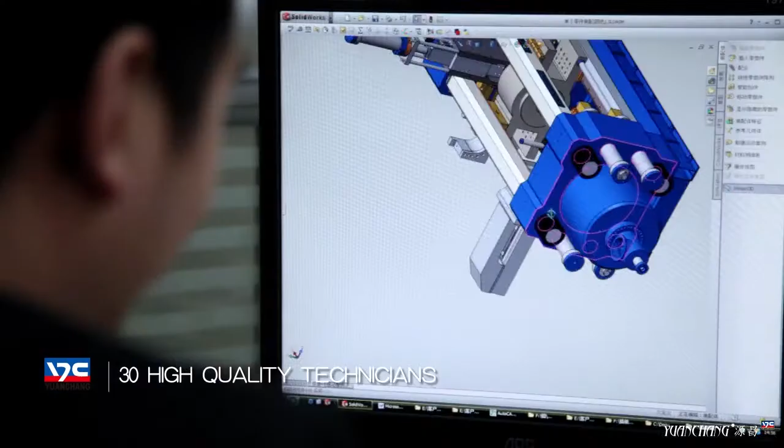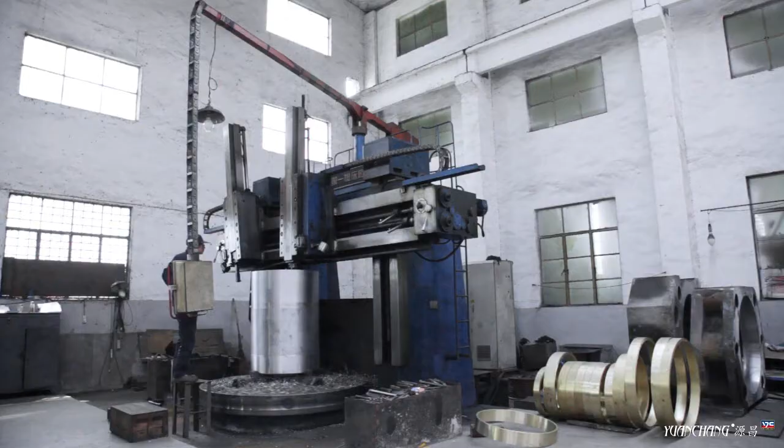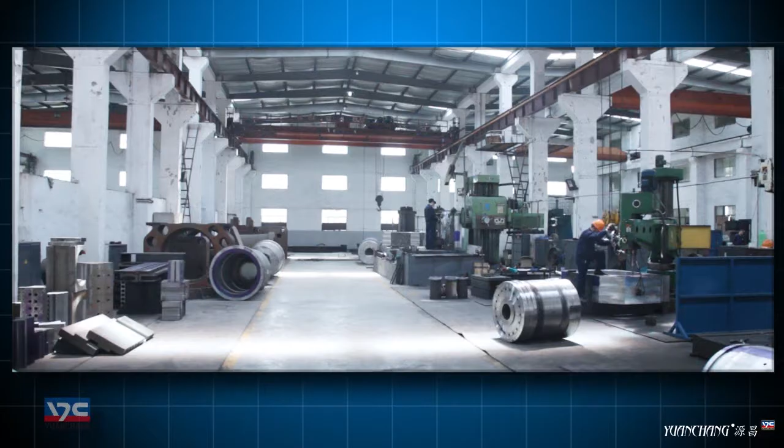Now the company has an area of over 30,000 square meters. The fixed assets reach over RMB 21 million, with high technology support from over 30 high-quality technicians and strong machinery capability, including more than 80 sites of machining equipment, such as heavy vertical lathe, large horizontal lathe, machinery center, NC numerical control lathe, boring lathe, milling lathe, drilling lathe, planing lathe, grinding lathe, etc.

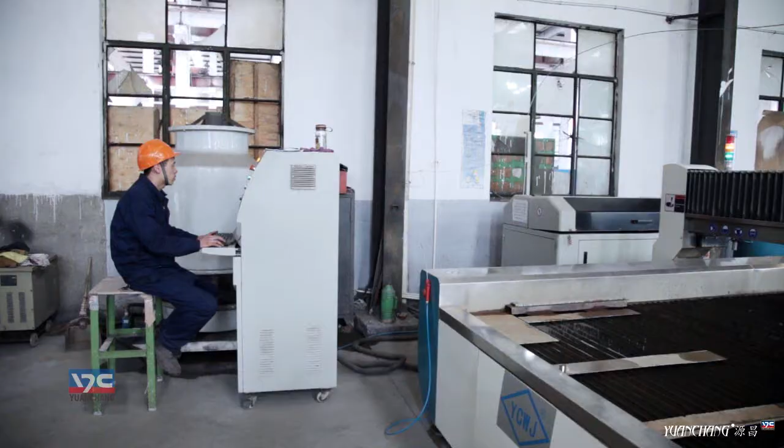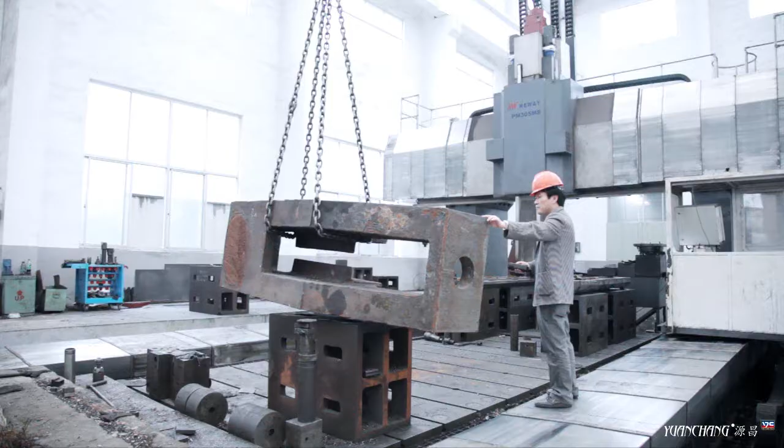The capability of the crane in the workshop reaches 100 tons. Meanwhile, the company invested in automatic water jet cutting machines, automatic cutting machines, etc. By yearly increasing the capability of technology and machining, Yuanchang Company persists in improving the quality of extrusion presses.

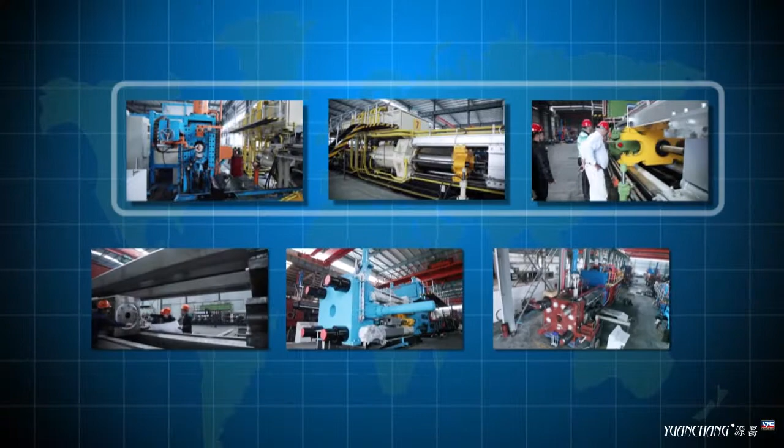Yuanchang Company has laid a strong foundation in the non-ferrous extrusion field. Recently, Yuanchang Company achieved the EU CE certificate, ISO 9001-2008 Quality Management System certificate, ISO 14001-2004 Environment Management System certificate, Measurement Guarantee Confirmation certificate, and several technical monopolies. The company is one of the most famous private technology enterprises in Jiangsu Province and a member of the Shanghai Non-Ferrous Metals Industry Association.

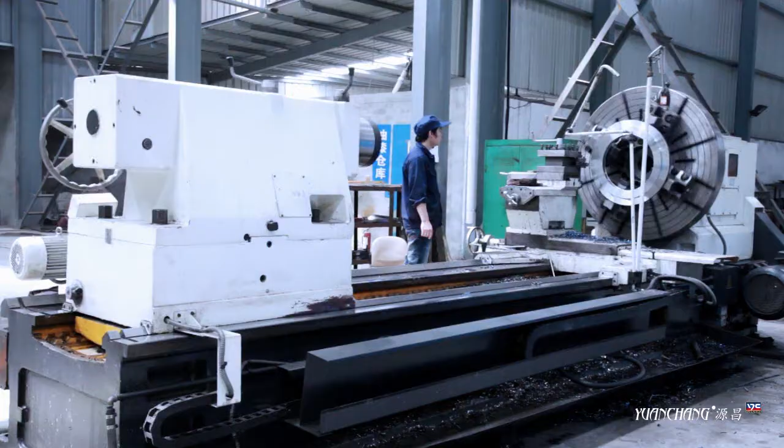On April 16, 2013, the subordinate enterprise of Yuanchang Company, Wuxi Yuanchang Machinery Tech Company Limited, started cooperation with Suzhou University and established a graduate student workstation. With the support of scientific research resources from Suzhou University, Yuanchang Company will achieve improvement in research and development strength. The product innovation will realize a qualitative change.

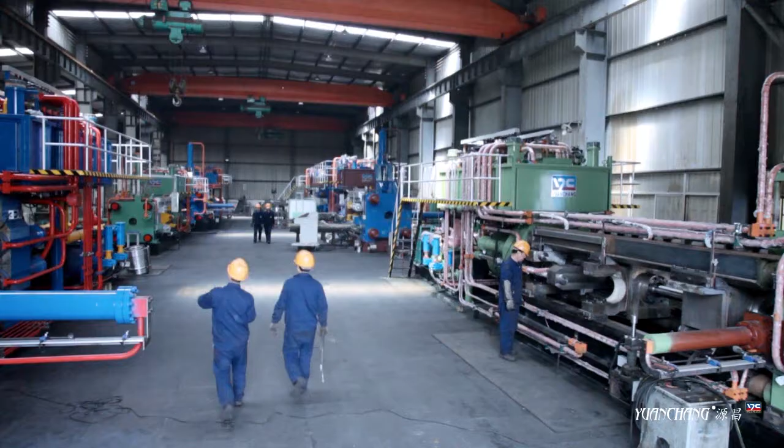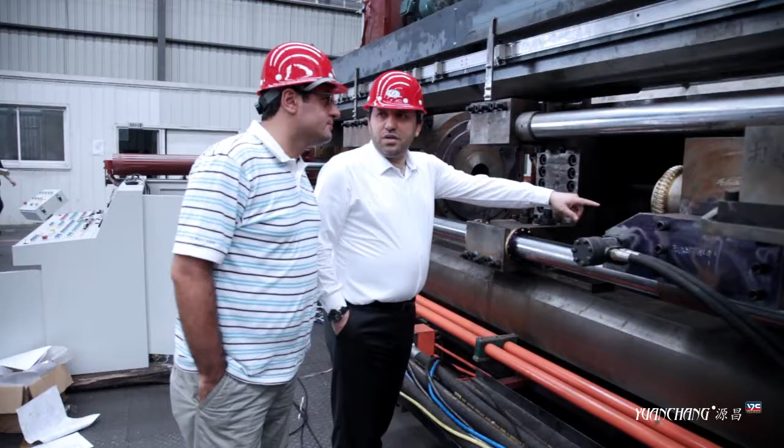Prosperity from improvement. Yuanchang people always keep a sense of tribulation and devote diligent, steadfast work to pursue the sustainable development of the enterprise. Achievement from innovation. Yuanchang Company always follows up on customers' requirements and improves product quality. The purpose of the company is to supply customers with the latest non-ferrous metals extrusion projects.

With great concentration management for several years, Yuanchang Company always achieves various work experiences. The company uses these experiences to realize customers' requirements. The experienced and professional image helps Yuanchang achieve acceptance by customers.

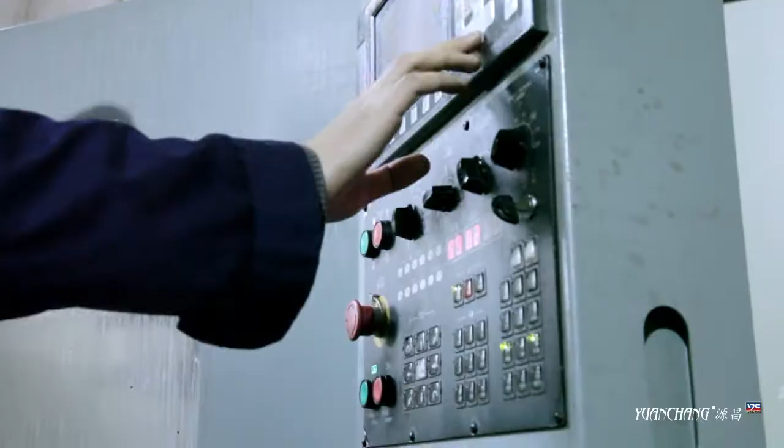The annual sales of Yuanchang are always number one in the Chinese industry. The stable increase of market share brings Yuanchang sustainable development. Meanwhile, it is also the endless power for technology improvement. Now Yuanchang extrusion presses are exported to many foreign countries, such as Russia, USA, Australia, Japan, Korea, Turkey, Syria, India, Uzbekistan, Argentina, Brazil, etc. Quality wins future.

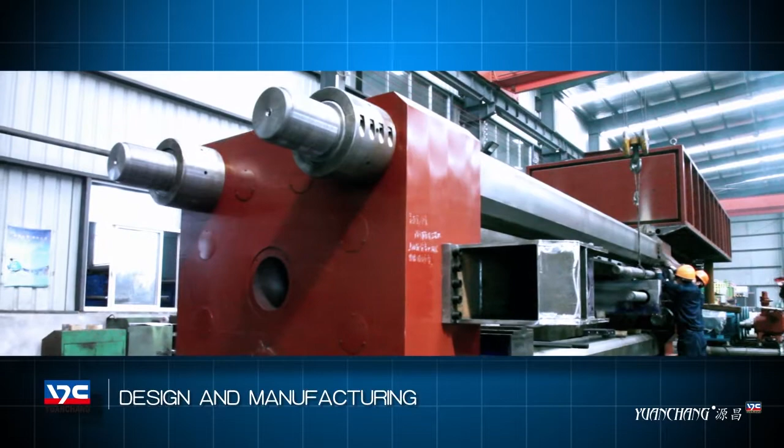Good quality is determined by carrying out each step during design and manufacturing, by the inspection of raw material, components, installation, and working pressure. Yuanchang Company follows up each step carefully for providing good quality.

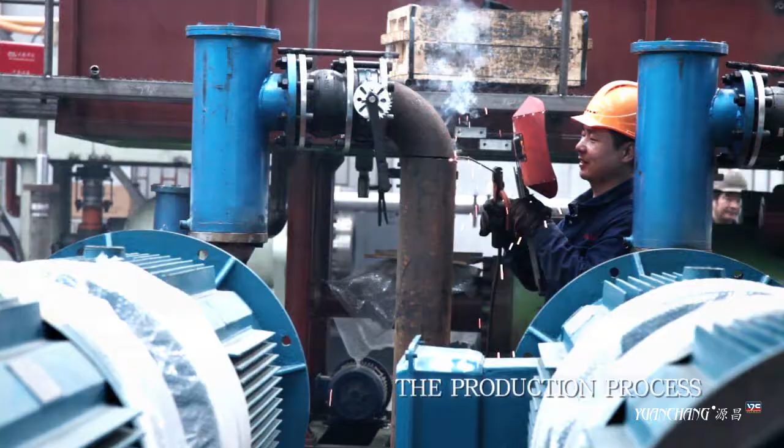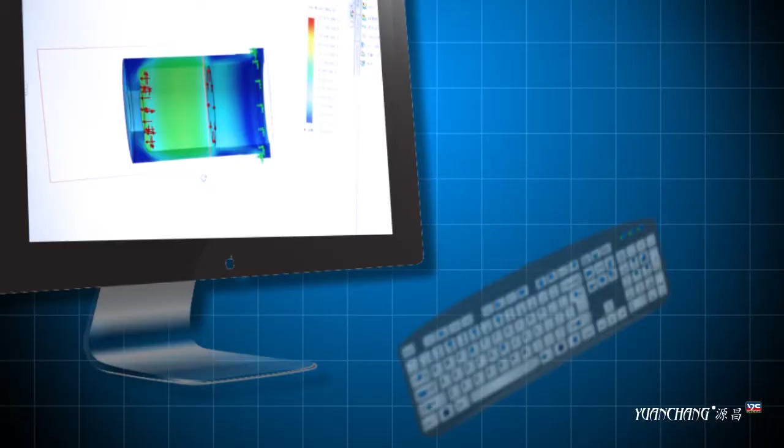Main mechanical parts are made of forged steel, such as the main cylinder body, main piston, etc. These parts will not have sand holes, air holes, shrinkage porosity, etc. The whole machine can have high strength. By passing finite element analysis, the manufacturer can learn accurate stress variation of each part for increasing the stability and safety of the machine.

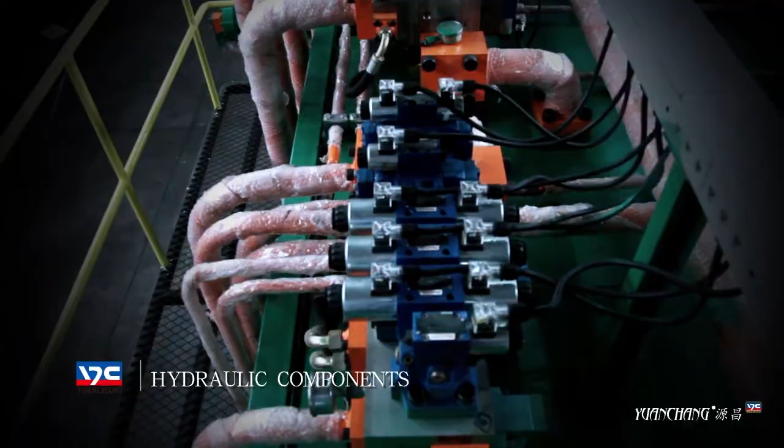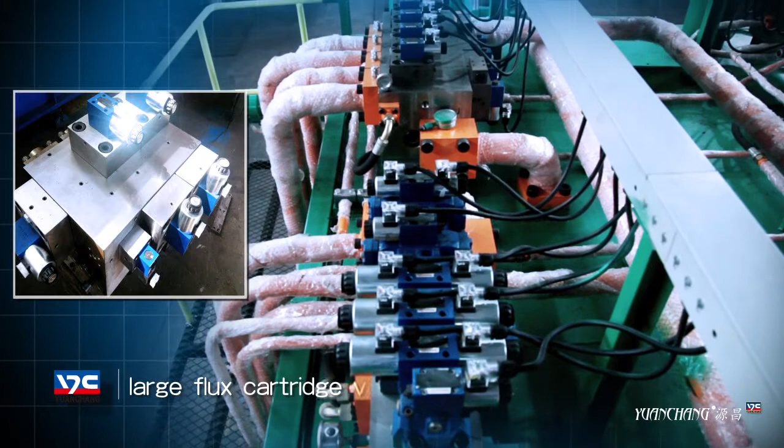Hydraulic pumps and hydraulic valves come from Germany's Rexroth, Kawasaki, USA's Vickers, etc. Good quality hydraulic parts can ensure stability, reliability, and low noise. Meanwhile, the hydraulic system is controlled by a large flux cartridge valve. By this component, the machine can work stably and reliably.

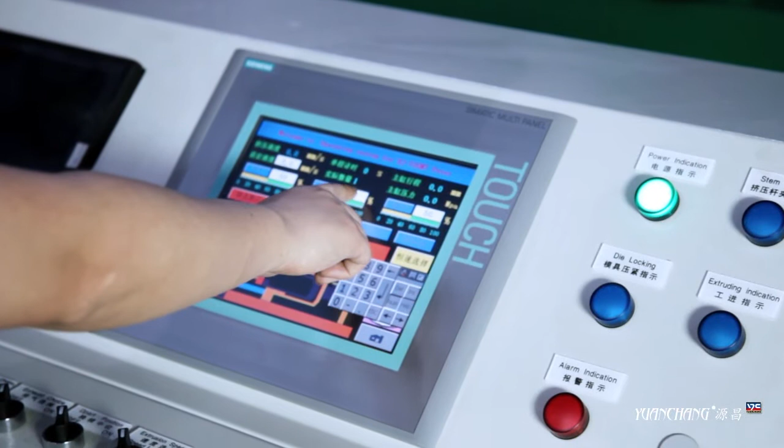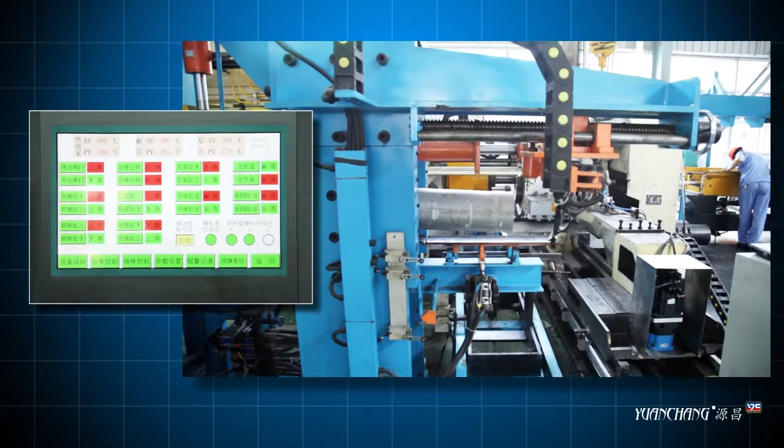The electronic control system is controlled by PLC and interface system. The manufacturer writes craft instructions into the PLC. According to different extrusion actions, PLC can send a signal to each workpiece and control each extrusion action. The interface system can follow up each craft parameter, such as extrusion speed, working pressure, temperature, etc. Meanwhile, the user can set or adjust each extrusion parameter in the interface system to meet extrusion requirements.

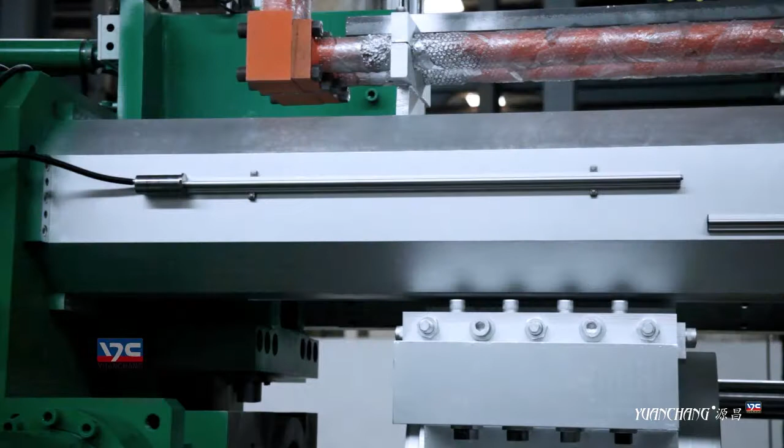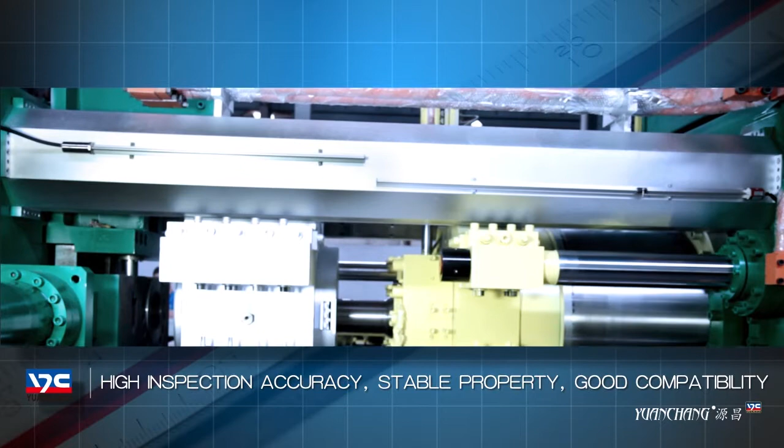Extrusion speed is inspected and controlled by an electromagnetic ruler. It has high inspection accuracy, stable property, and good compatibility. By the comparison and corrective action between measuring speed and rated speed, with a calculation by PLC, this control system can do ISO speed extrusion craft. Optimize the industrial structure.

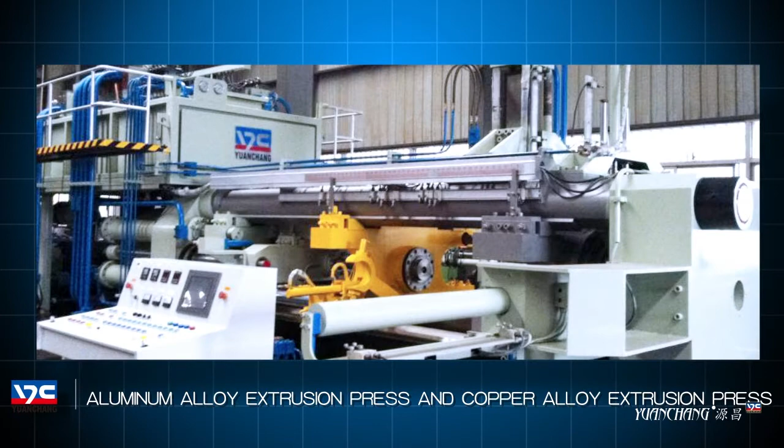To meet customers' requirements for different non-ferrous metals, Yuanchang Company mainly produces two kinds of extrusion press: aluminum alloy extrusion press and copper alloy extrusion press. On this basis, Yuanchang Company developed magnesium alloy extrusion press, silver alloy extrusion press, and other alloy extrusion presses.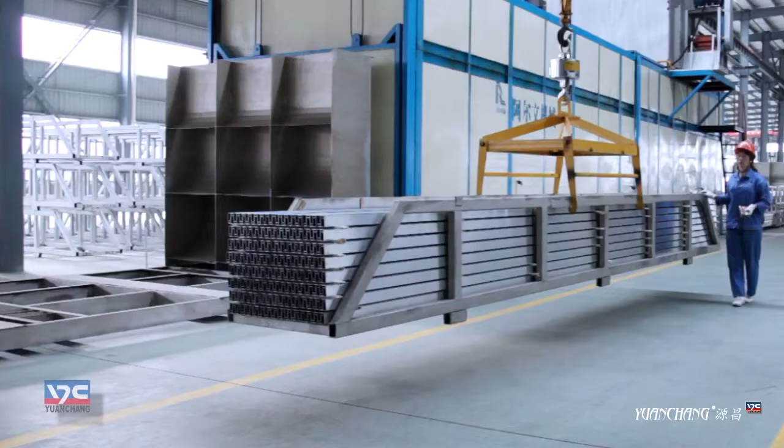Because of the good extrusion forming property of aluminum alloy, extrusion press is widely used in the market now, in the fields of construction industry, transportation, communication, industrial products, etc. You can always find a product made by Yuanchang extrusion press.

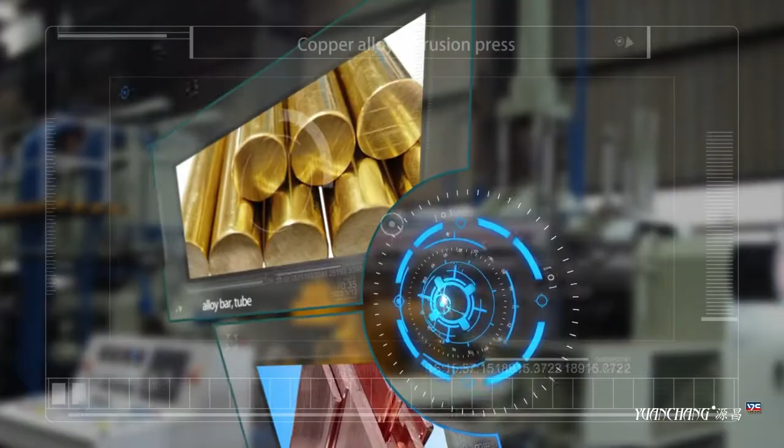Copper alloy extrusion press is mainly used for extruding copper, brass, and other copper alloy bar, tube, flat bar, and profile bar. These products are widely used in the fields of electric power, communication, refrigeration, water heating, industrial products, etc.

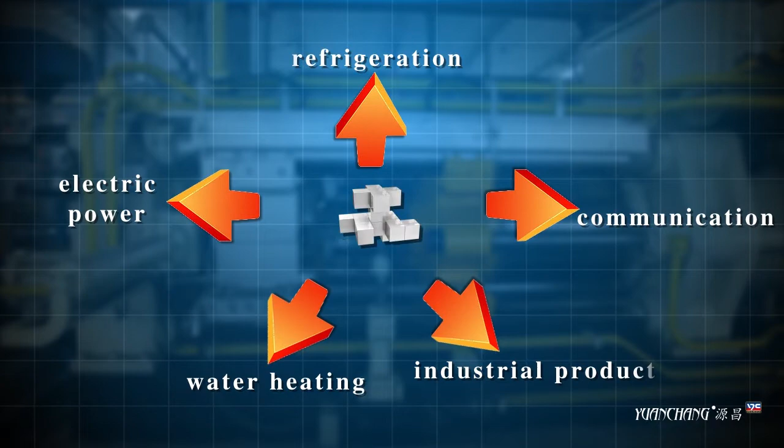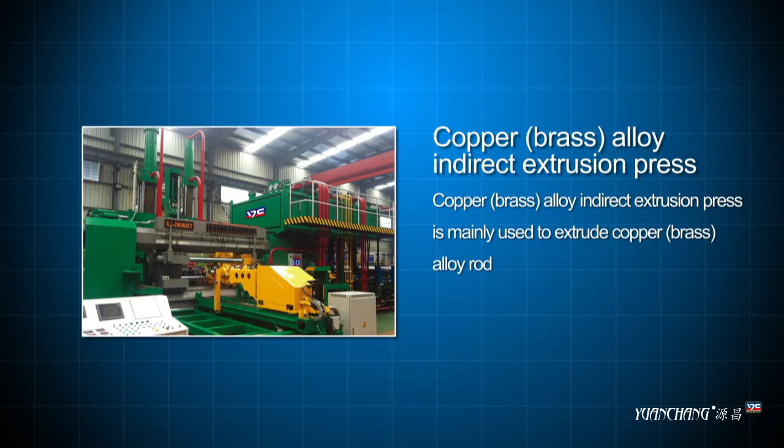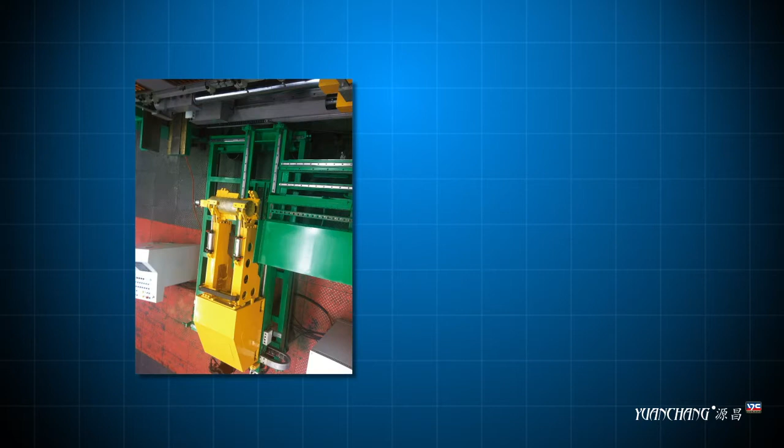Copper brass alloy indirect extrusion press is mainly used to extrude copper brass alloy rod, wire, and other products. Its features are high efficiency, stable quality, and no back scrap. Now it is widely used by users in the domestic market and foreign countries.

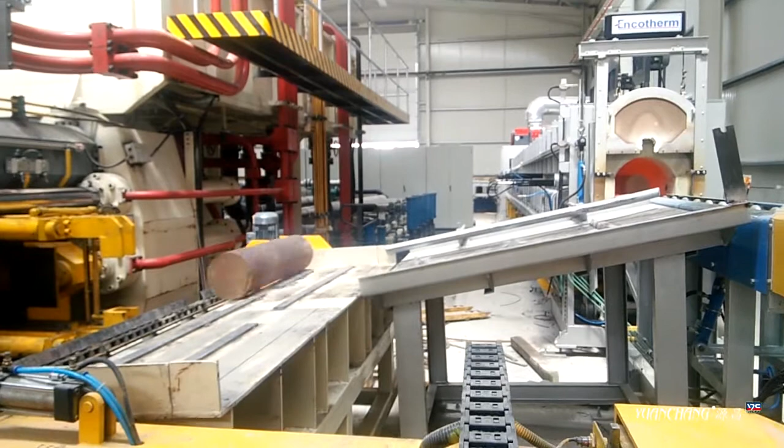The transfer car will take the copper brass billet to the extrusion center. After the cleaning step and the cap catches the copper brass billet, the transfer car will move back. The container will be closed. The stem moves to the extrusion center.

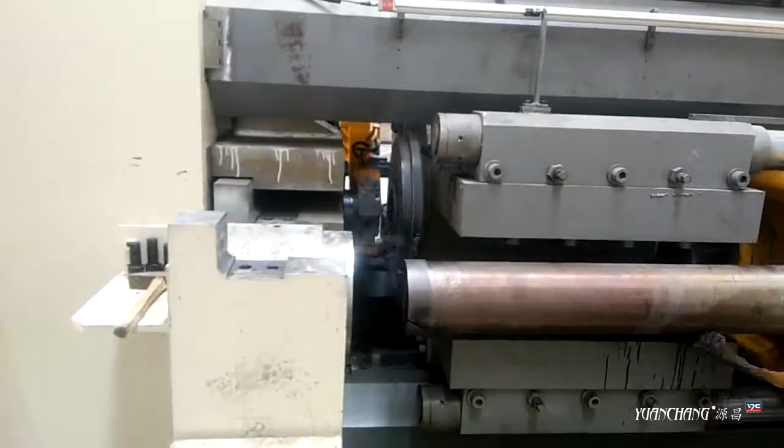The main cylinder moves forward and extrudes the product. After extrusion, the indirect shear will move down to cut the scrap. Then the cleaning step will move to the extrusion center to clean. At the same time, the automatic die holder will fix the die on the indirect stem to prepare for the next extrusion.

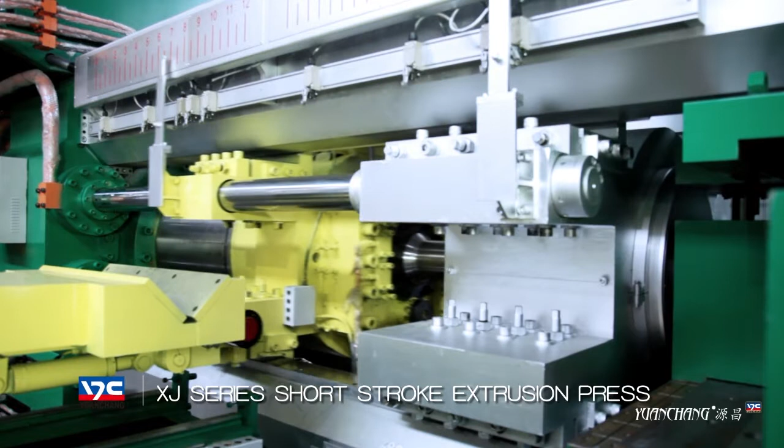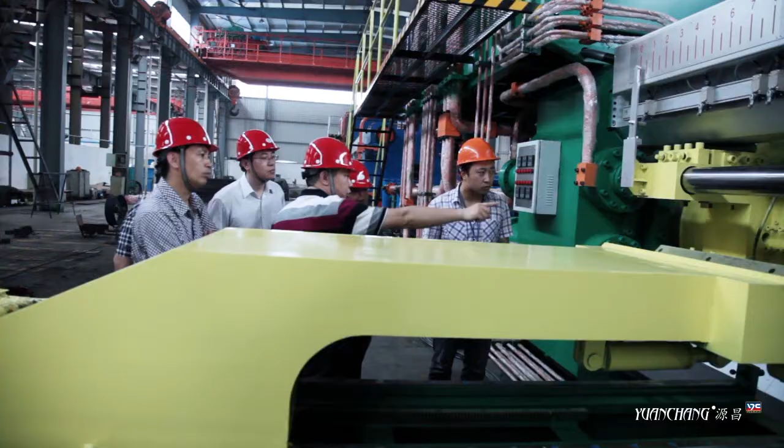XJ Series Short Stroke Extrusion Press. By continuous technical improvement, Yuanchang Company developed the XJ Series Short Stroke Extrusion Press. Because of its strong rigidity, quick loading, and stable uniform extrusion, from the beginning the XJ Series Short Stroke Extrusion Press became the customer's favorite.

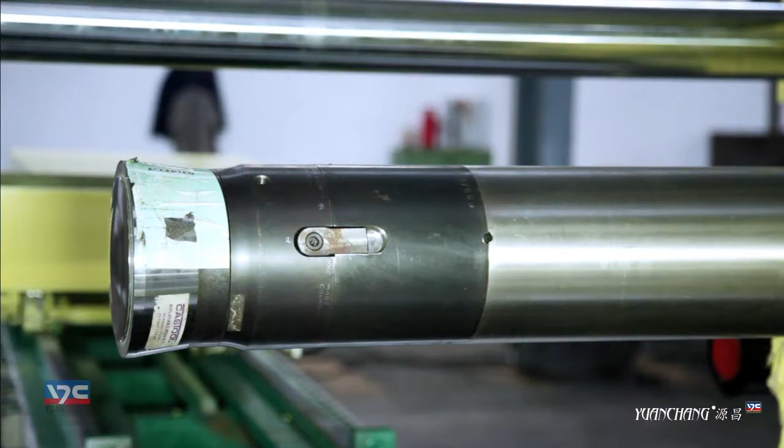Short stroke extrusion presses from Yuanchang Company use a horizontal loading system. This system has the advantages of stability, accuracy, and high speed. Under automatic mode, by using a fixed dummy block, the producing speed can be fast and the efficiency can be high.

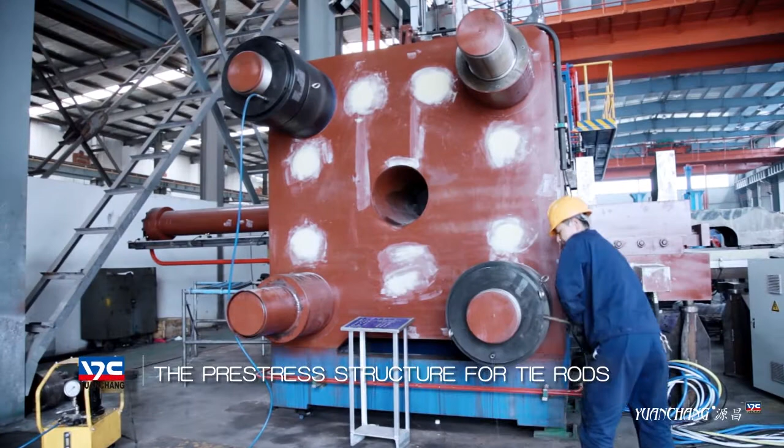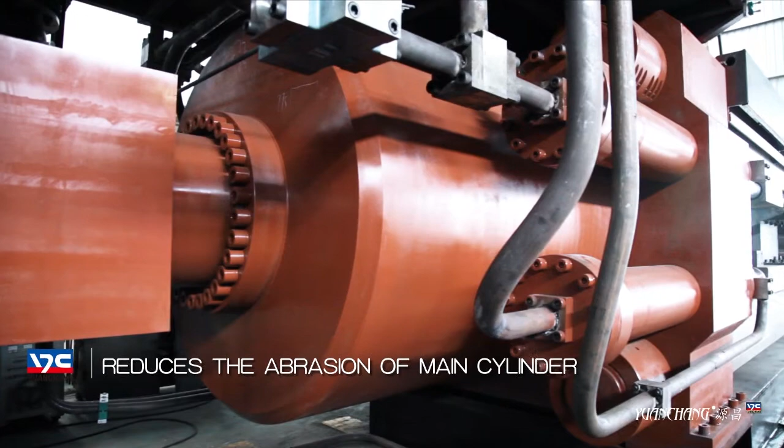The pre-stress structure for tie rods can increase the complete rigidity. It brings good stability and high accuracy for extruding. The machine runs stably. The low-impact hydraulic system reduces the abrasion and deviation of the main cylinder. It brings low consumption and saves raw material.

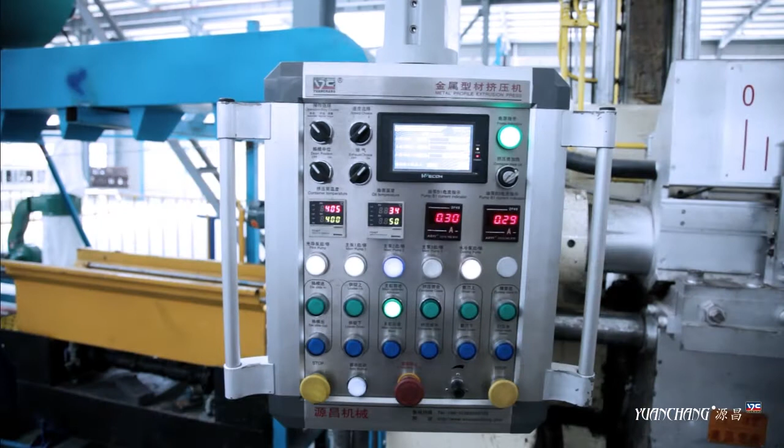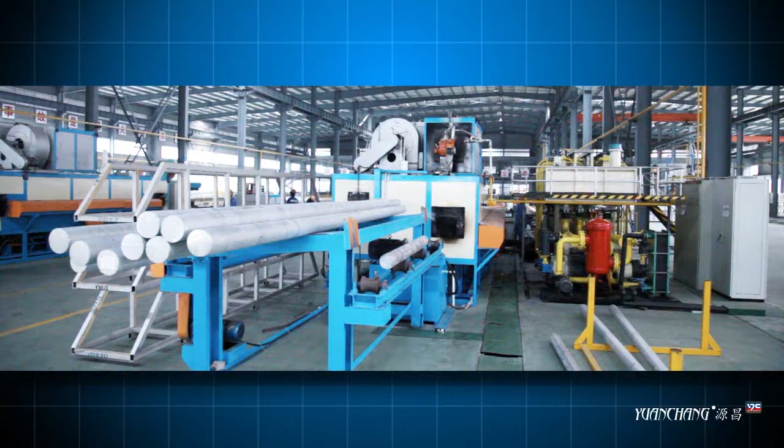Introduction for assistant equipment. Apart from producing all kinds of non-ferrous extrusion presses, Yuanchang Company can produce assistant equipment such as fully automatic hot shear furnace, handling table, etc. The hot shear furnace from Yuanchang Company has a high degree of automation and easy operation.

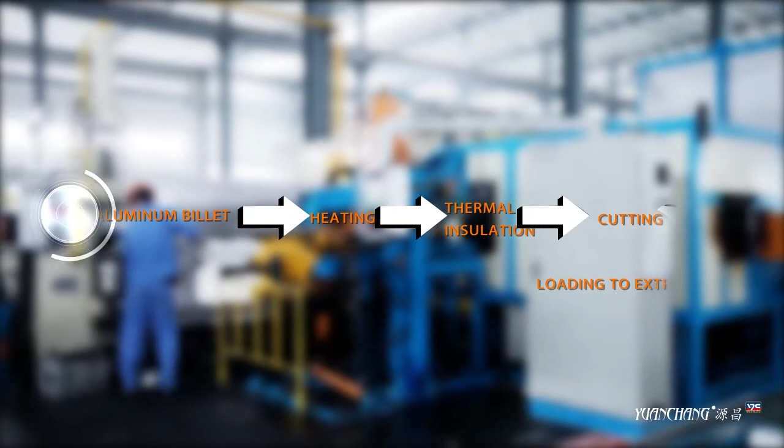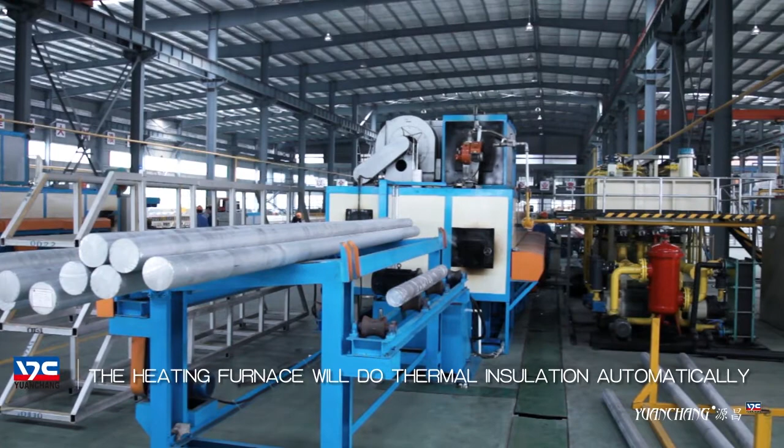All steps include the entrance of aluminum billet, heating, thermal insulation, cutting, and loading to the extrusion press. All steps are controlled by PLC. When the aluminum in the furnace reaches a certain temperature, the heating furnace will do thermal insulation automatically. By this step, the aluminum billet can keep good homogeneity before extrusion.

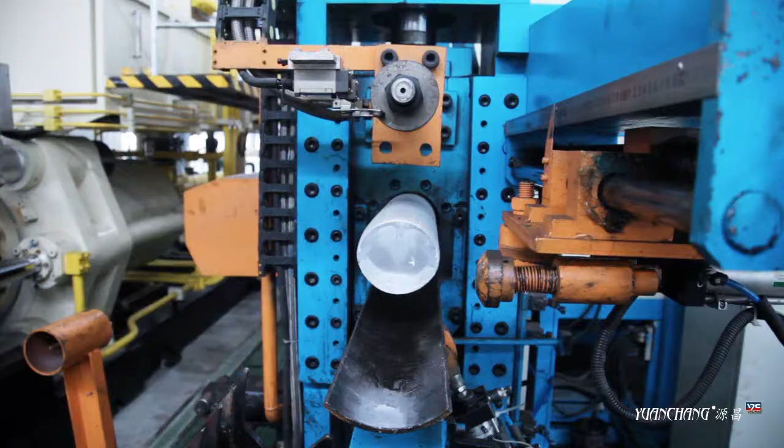After this, the automatic cutting machine will cut the billet into certain lengths. Compared with the saw cutting machine for sawed billet furnace, this furnace will not bring sawdust. The cutting length can be adjusted. By this way, users can save raw material, increase the rate of finished products, and reduce cost.

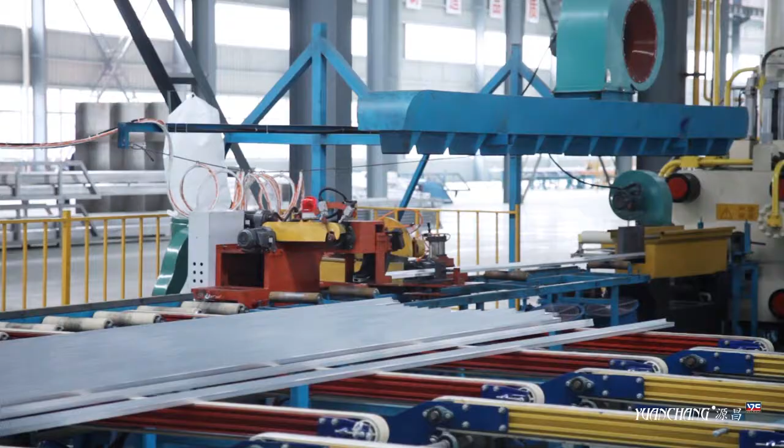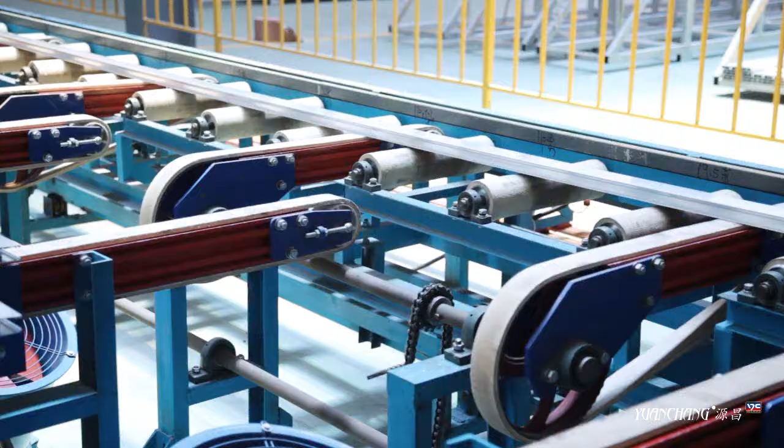The puller for the handling table is driven by a steel wire rope. This transmission is efficient and quick, and it can save a lot of time for return. By optimization design, the lifting mechanism of the initial table and finish saw table have a simple structure, reliable running, and easy operation.

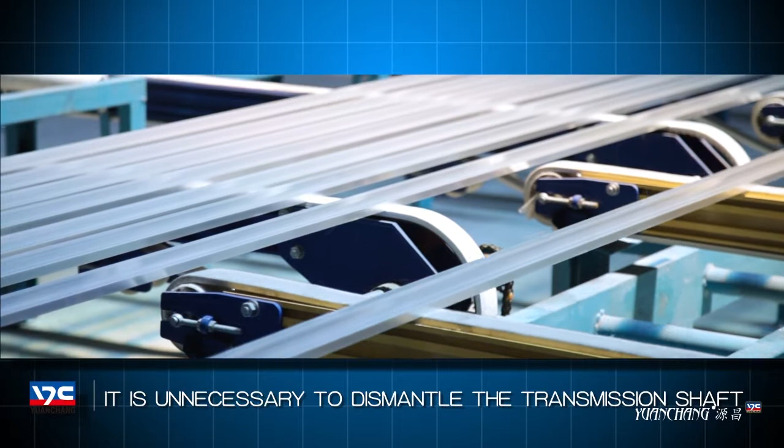The through-shaft transmission of 1-stage, 2-stage, 3-stage, 4-stage transmission is exchanged with short-shaft transmission, which is driven by gear motor. During maintenance, by exchanging the felt belt, it is unnecessary to dismantle the transmission shaft. Each felt belt can be exchanged independently, which can shorten maintenance time.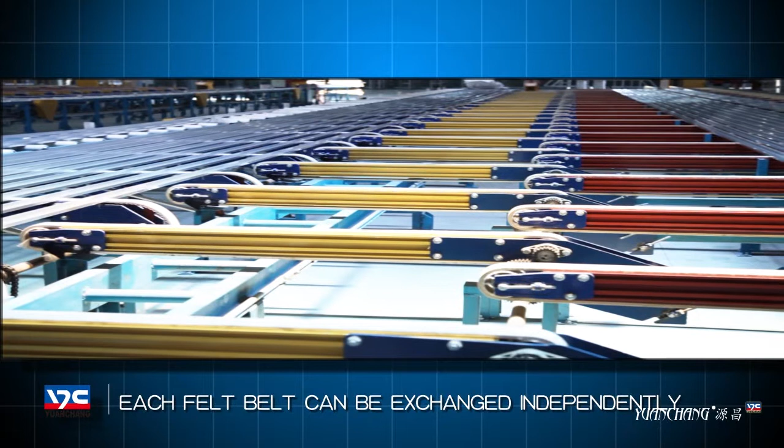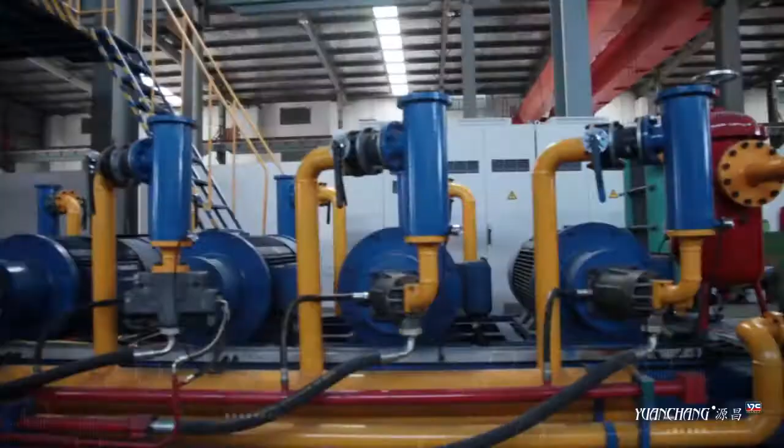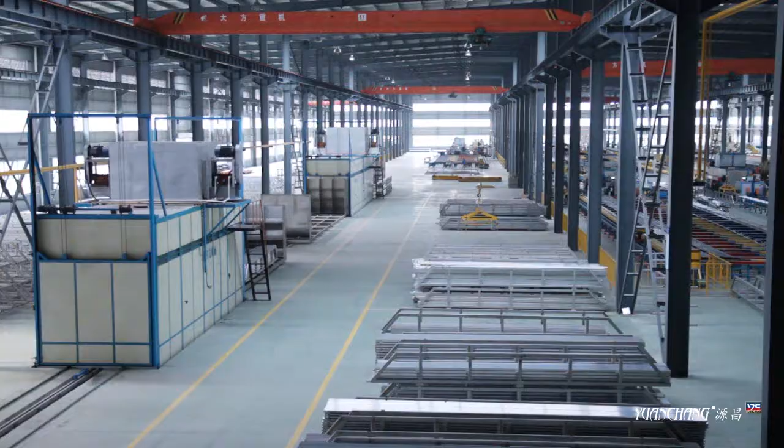Further prosperity, sustainable management. Yuanchang Company will not quit the steps for technical improvement and product innovation. Yuanchang Company will devote all its efforts to providing customers with all-round, high-quality non-ferrous metals extrusion presses, laying a firm foundation for sustainable development. From now on, Yuanchang Company can step into a virtuous cycle of enterprise development. Yuanchang Company wishes to make sincere cooperation with you for our mutual prosperous future.